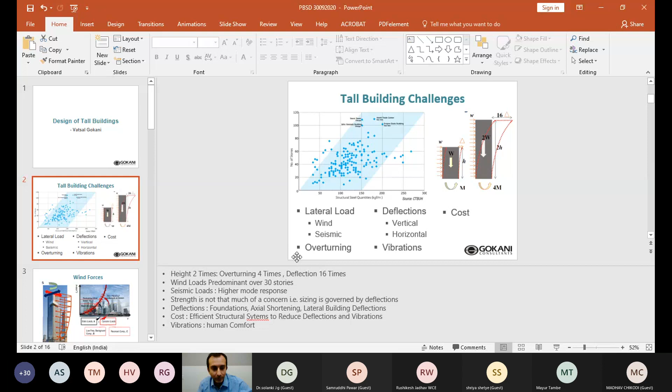Hello, sir, your voice is not coming. Hello sir. Samruddhi, both audio and video— Hello. Sir, your presentation is visible, but please unmute yourself. Hello? Hello, sir, can you hear me? Yes, voice clear, sir. Hello? Sir, nothing is audible. Hello, sir, hello? Am I not audible? Yes, sir, your voice is audible now.

So an introduction was given regarding tall buildings and why they are required. The main difference between a tall building and a short building is that both these buildings have gravity loads on them, and both are susceptible to lateral loads. But the main challenge in a tall building is that these effects increase exponentially, so certain important and significant behaviors in the building become very sensitive, and that starts governing the design.

Let me give you an example. A building is nothing but a cantilever coming out of the ground. There are two images, one with a smaller building and one with a taller building. The smaller building has a height of h, and the taller building has a height of 2h. If the load applied on these building cantilevers is the same, the bending moment at the bottom increases by 4 times due to the lateral loads. The vertical load increases only 2 times, but the bending moment due to lateral loads increases by 4 times, just by a height difference factor of 2, when the building goes from height h to 2h.

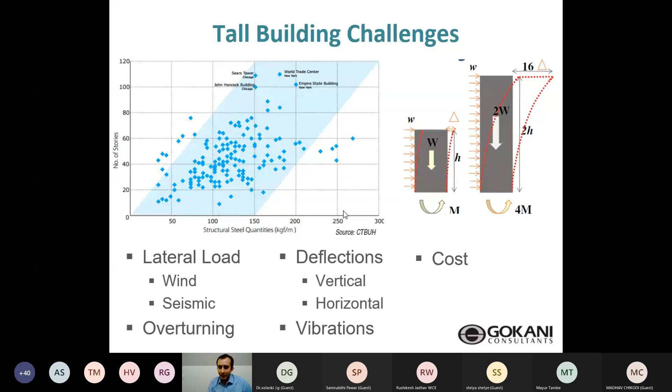So these are the main challenges in a tall building, and everything else falls into place if you address these challenges one by one.

Now I'll come to wind forces, one of the most predominant forces in a tall building. Wind forces acting on a building are not just static loads, they're dynamic loads. Because wind comes in gusts, there's a fixed component and a fluctuating component to the wind. You might have felt this sitting on a mountain in the open—wind doesn't just continuously hit you, there's a fluctuating component as well.

This fluctuating component, combined with the slenderness of the tall building—since deformations increase exponentially as building height increases—interacts with the dynamic, fluctuating components of the wind, and this is what controls the wind design.

These wind loads acting in one direction - we sometimes feel that because of the slenderness of the building, it will vibrate in the same direction. But that is not true. Even with wind predominantly in one direction, there can be crosswinds and torsional components which make the building vibrate in the direction perpendicular to the main building. This is what needs to be analyzed, and this is why wind loads become very important as the building becomes slender, especially in tall buildings.

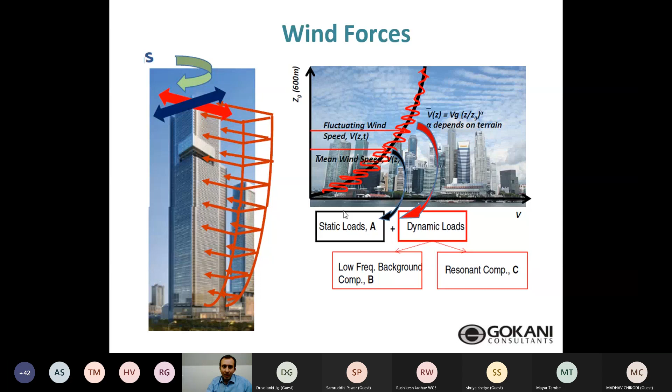The next slide is just a 1-minute video of how the oscillations take place in a building. It will give you a feel for what you need to control as a structural engineer. I don't know if this is a poorly designed building or not, but this is something that happened at the 50th story. I'll just play the video.

This is a chandelier - it's shaking. If you were sitting there, you would not be really comfortable with the chandelier shaking with respect to the floor. It's a very scary situation.

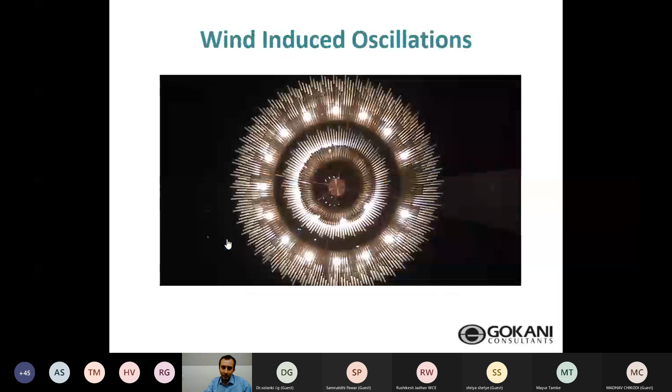This is kind of a long video, just 1 minute, but you'll understand what happens.

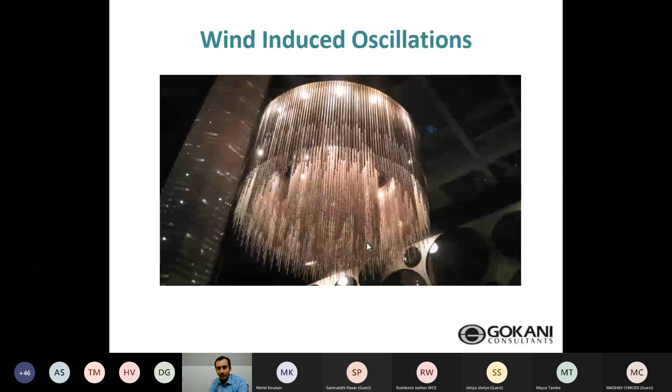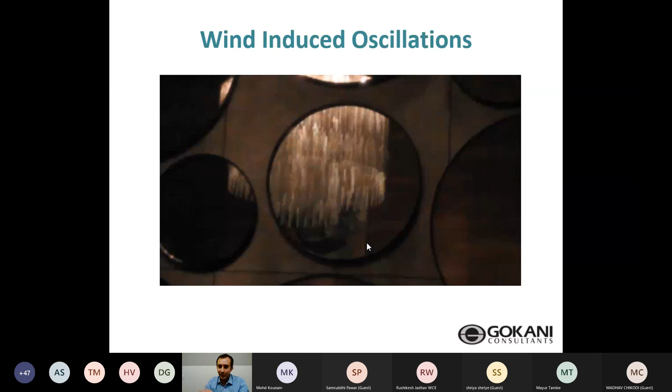You can see the oscillations in the wind with respect to the oscillations in the chandelier relative to the mirror. This is what happens, and it's very uncomfortable for a user - the building will not fail, but it's very uncomfortable for someone dining in a sophisticated restaurant. So this needs to be controlled by the structural engineer.

These wind forces are calculated using codal provisions, but the codal provisions give only a very approximate estimation of the forces, and these are valid only for certain assumptions - that the building is properly rectangular or properly square. They will not give you detailed calculations for the accelerations and vibrations happening at the top of the building.

So then what is the way out? What we generally do is make a scale-down model of what is actually happening around, and we estimate the building based on historical data of wind collected from various locations. In a wind tunnel, you test this at a much smaller scale.

We combine it with the flexibility that is there in the tower, and then estimate what kind of forces are going to come on the wind structure and on the tower, what kind of vibrations are going to come on the tower, whether they'll be within control or not. Such wind tunnel studies are very important for high-rise buildings, especially when the building goes above 150 meters or is very, very slender.

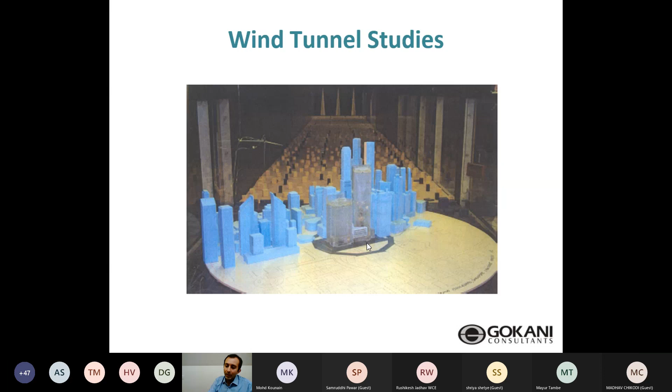The other forces that act on a building are seismic forces. The real seismic forces that you design for are generally about 1/10 to 1/8 of what seismic forces the building would really endure during an earthquake.

So what is the reason? These seismic forces are very, very high, and you cannot really design for these forces - you make the building go into the non-linear mode, that is, make the building crack so that it just stands. This is the philosophy of seismic design. That's why a lot of times, around 30-story buildings, the wind forces tend to be higher than the seismic forces. But you need to design to make sure that although there is cracking, there is no collapse - this can be done using ductile detailing.

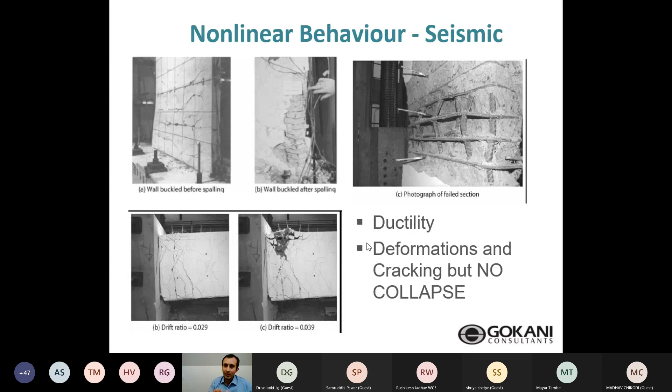This is again very, very important for a tall building. Secondly, what is important for a tall building is that it will not just vibrate like a pendulum coming out of the ground - it will have various multimodal effects that need to be checked when you analyze a tall building.

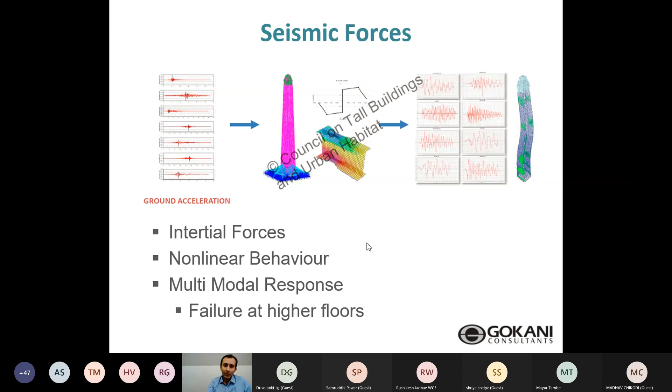For very, very tall buildings, you need to do something like an analysis where I'll show you what kind of analysis we've done in our office, and you see the kind of vibrations that happen. This kind of design is not done in a regular design office, but see the behavior - this is the behavior that happens in the real earthquake, which cannot otherwise be captured.

So this is what wind tunnel is to code-based forces - this kind of performance, this time history-based performance, is the difference between the codal analysis and this behavior. This is known as something like a performance-based design, and this is again state-of-the-art in the design of tall buildings.

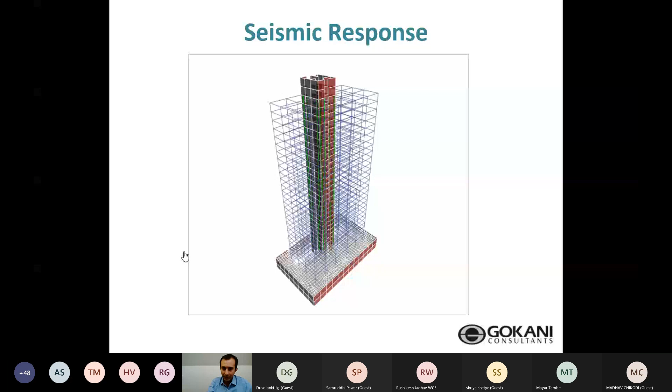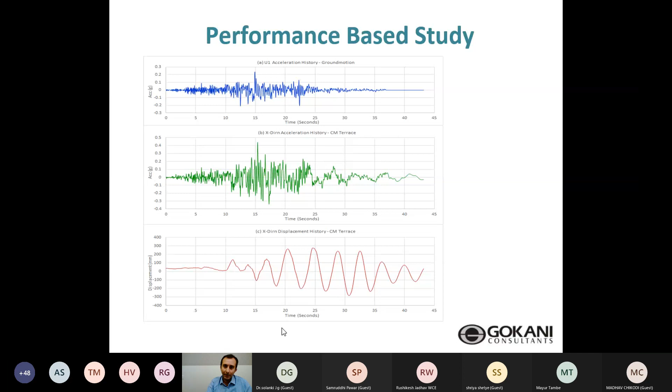So you study the real performance of a building and find out the accelerations and the forces on the building. The other important aspect in tall buildings is vertical deflections.

Why vertical deflections? Because a lot of times we need to segregate the lateral load resisting system from the vertical load resisting system, as the load resisting system that takes care of lateral forces is much thicker and stronger than the columns placed on the periphery or at various locations. These columns are pretty small compared to the cores and shear walls.

So what tends to happen in these tall buildings is the vertical deformations of these strong, heavy shear walls is much less than the axial deformations of these very slender or small columns. This can cause differential shortening, leading to serviceability problems, cracking of partitions, cracking of glass, and you would not like to stand in an area that is sloping because it has deflected. This will not actually create a structural failure, but it is a serviceability failure.

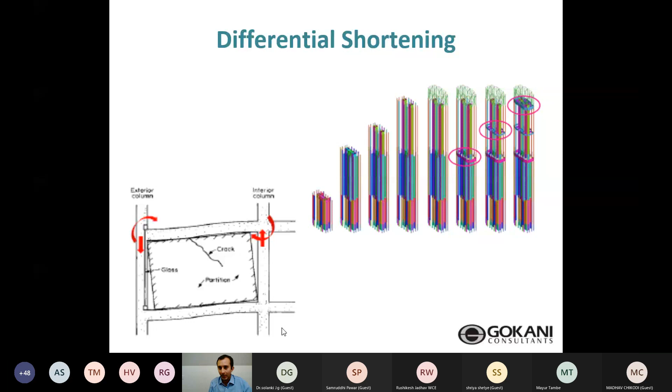These failures need to be addressed, and in really tall buildings they're addressed using staged analysis, which is a state-of-the-art, step-by-step analysis to understand what kind of deformations happen as the building goes up and over time because of differential creep and shortening. So this is another important aspect in a tall building.

Another important aspect in a tall building is foundation design and settlement. Tall buildings tend to have foundations that are very close together, and these closely spaced foundations interact with the soil or rock below. What happens is the deflections you calculate for individual components are much smaller than the deformations you calculate for the entire foundation system.

Because of this, the differential settlement—the settlement from one end of the foundation to the center—becomes of utmost importance for serviceability purposes. If you do not design this well, the building might not fail, but it might sag at the center and not deflect at the ends, creating a serviceability problem where it's not feasible to use the building, or sometimes the building will tilt on one end. So these things need to be taken care of by sophisticated analysis.

So these are the four main things that need to be taken care of. The second other thing is, since lateral loads are very important, a lot of times in these slender buildings overturning takes place. So differential settlements and overturning in tall buildings are absolutely important and need to be taken care of.

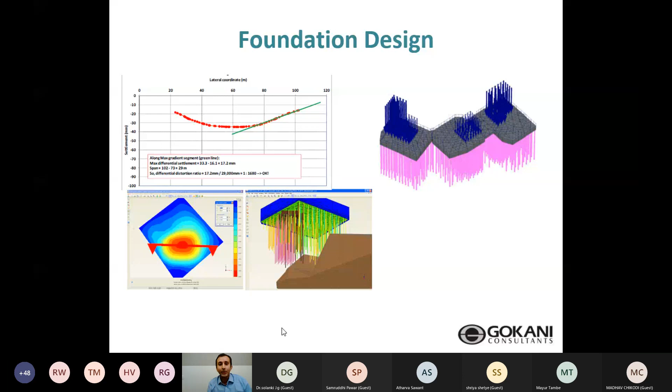I'm not saying all this does not need to be taken care of in a small, shorter building, but all these aspects we discussed—vibrations, seismic loads, multimodal effects, differential settlements and overturning, and different axial shortenings of the shear walls and columns—are actually very sensitive in a tall building and need to be checked explicitly.

So this is over and above what you do in a smaller building. Now, since a tall building is slender, you do not have a lot of floor space area to put in material required to resist all these forces. So innovative and very efficient structural systems are important, which maximize the cross-sectional moment of inertia of the building, and for a given amount of material produce the least lateral deflections. Depending on the height of the building, you'll have to use more innovative and efficient structural systems.

For example, a structural system could be a shear wall system, a beam and column system, or a combination of a shear wall and beam and column system. Sometimes, if it's a steel structure, you use braced frames. So how you use that in a tall building becomes very important.

For example, a braced frame in a steel structure works fine for approximately a 10 to 15 story building. But once you go above that, these braced frames start to become inefficient—you'll be able to design the building, but the braced frames become so heavy that the building becomes very expensive. So then you move to a more rigid system, like a system with concrete frames.

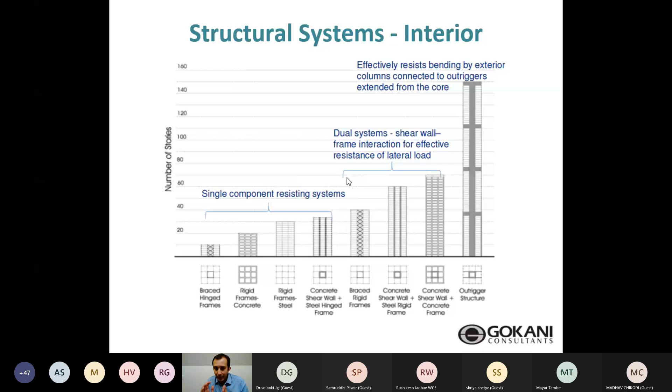Depending on the height of the building, it would be very important to select the optimum structural system. This is very important as far as usability and cost is concerned.

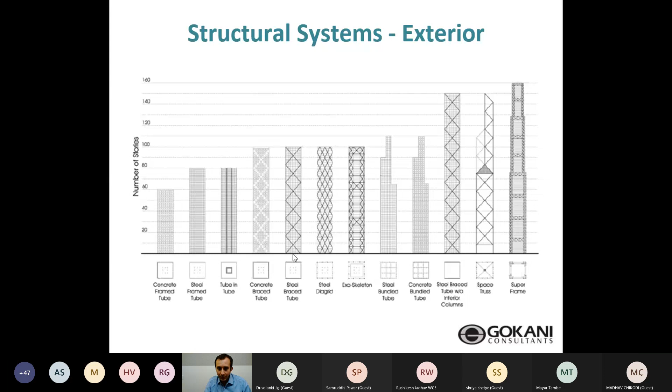The other structural systems, for exterior structural systems, are bracing type of systems, tube-in-tube type of systems, and super frame kind of system.

To give you an example of dual systems, take for example this building, which is approximately 180 to 250 meters tall, where a dual system would work very well. A dual system uses shear wall as well as frames.

So you can see there is a lot of shear walls at the center. There is a flat slab around, and there are these columns and perimeter frames which engage these columns, increasing the moment of inertia of the entire system.

If it was only a cantilever system, it would sway more, and then you combine that with these perimeter moment resisting frames, which tend to come into effect on the top floors, giving you a very efficient dual system.

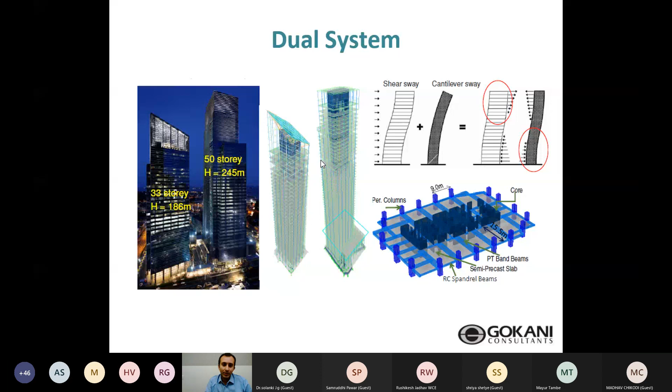Now, if you have higher structural systems, taller buildings, you need to use more innovative structural systems like the outrigger systems.

So you have a shear wall core at the center, and you have these exterior columns, and you need to engage the entire width of the building, because this width is pretty narrow for a tall building which is 250-300 meters.

And to engage this entire width of the system, you need to introduce strong elements connecting the core to the outside. For example, imagine you are standing and somebody pushes you, so you will fall down.

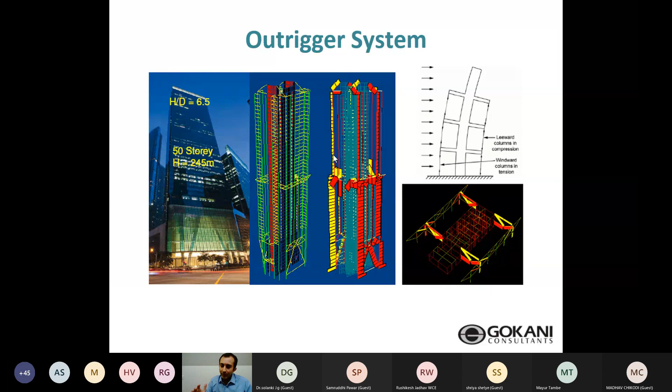But imagine you are standing and there is a table next to you, and you take support from that table. So for somebody pushing you, he will have to put in much more effort to topple you. This is the kind of outrigger structural system.

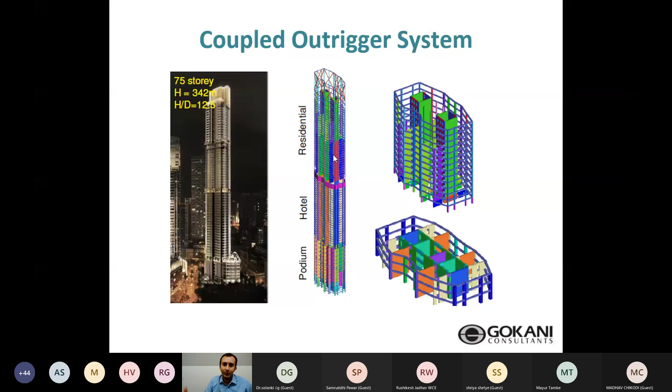Then there is something called a coupled outrigger system, where you have coupled shear walls with certain cutouts at certain floors, and these cutouts make the system an outrigger system. In effect, they are coupled shear walls which engage the entire width of the building, and these systems can be very effectively used for very slender buildings.

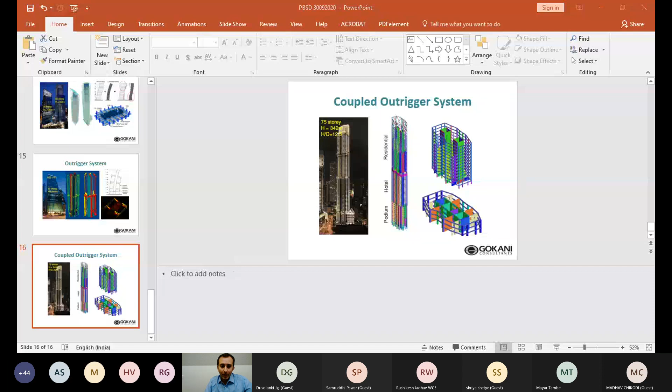So with this, I would like to end my presentation. What I'll do is go to a live example that we designed in my office. This is around a 175-meter tall building, and I'll show it.

I will start with presenting the design basis report of a high-rise building, approximately 170 meters tall, which was designed in Mumbai, and the slenderness ratio is 1:9.

I hope everybody can see this high-rise report. Can you see this, whatever I have presented? Yes sir, it is visible.

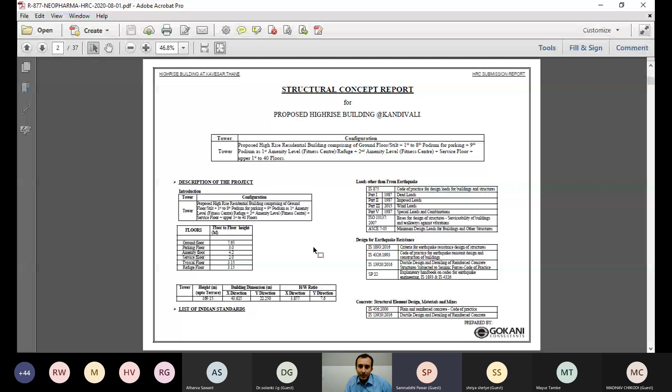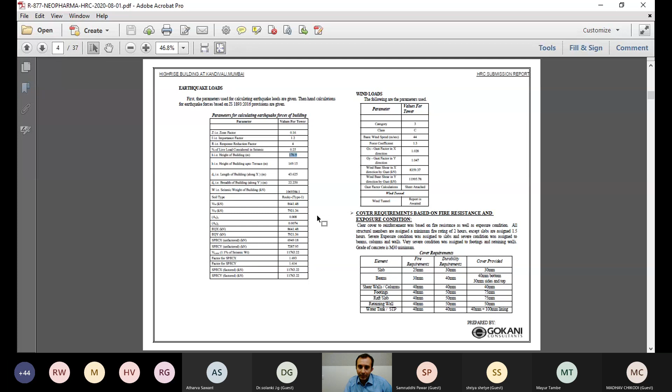So the height of the building is 176.9 meters, and the base width was pretty slender, as in the lateral load resisting base width. I'll show you first the plans of the building.

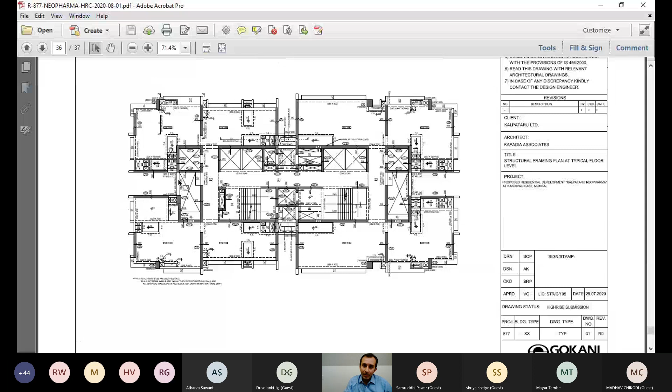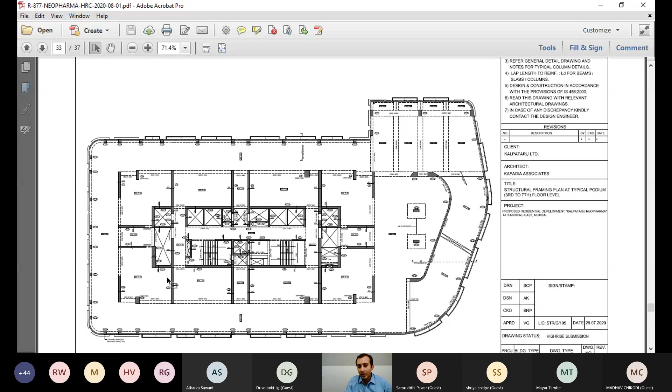On the lower floors, these gravity columns are just for the ramp. These are gravity columns, they do not take part in the lateral load resisting elements. These vertical frames, these vertical shear walls are what are actually taking the lateral load. So these gravity columns are in fact floating from the ground floor as cantilevers, because we needed open space for the 9 meter cantilever. But since they are part of the gravity system, not the lateral load system, we could do that.

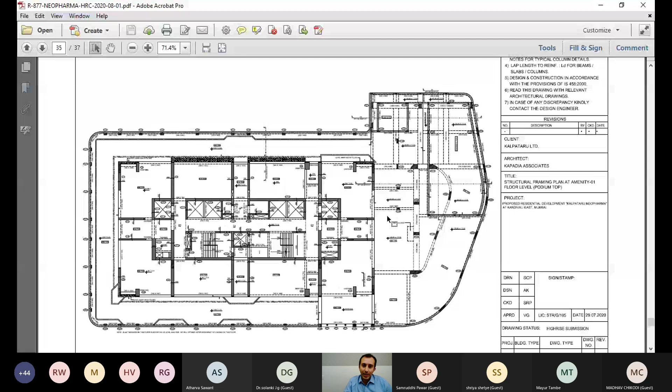So this is a pretty complex building. At these amenity floors, we close up the openings, creating 2 stories deep or 1 story deep outrigger beams, so that the moment of inertia of the building increases. So effectively, even though the building is pretty wide at the bottom at the parking floors, the lateral load is only taken by this small distance, which is the main building width. And that was what was governing the deflections and the accelerations at the top of the building in wind.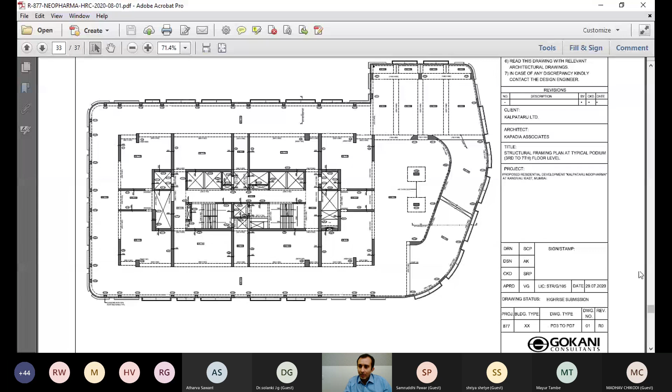So what we did was we created this report for the high-rise committee, and I'll just run through the report. This is the proposed high-rise building with 9 podiums, amenity floors, 2-level amenity floors. There is an amenity floor at the top also. There is a service floor, and then there are 40 habitable floors.

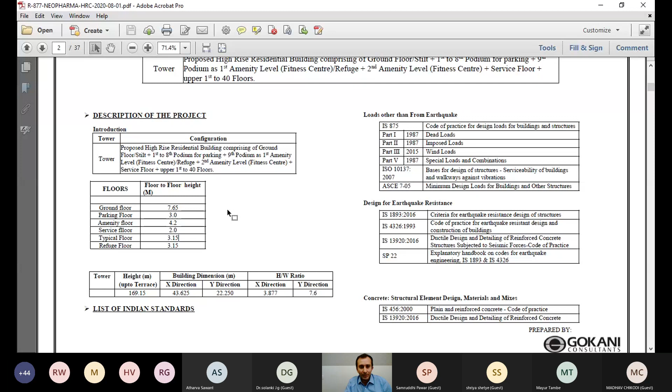The typical floor height is 3.15 meters. The ground floor height is around 7.65 meters. The amenity floor heights are 4.2 meters. So up till the terrace level, the height is 169 meters, and up till the top, including the elevations, the height is around 180 meters.

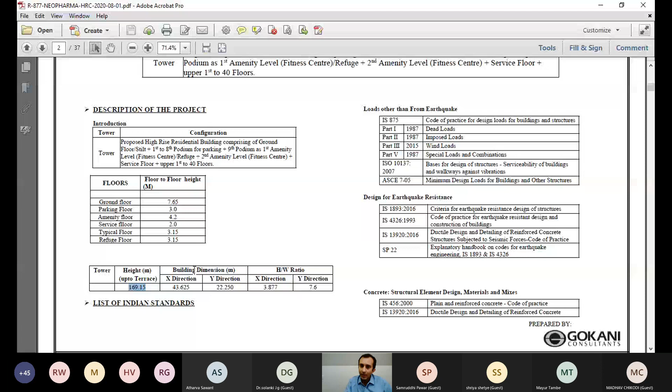So these are the various codal provisions that we have used in the design of the building. In addition to this, we've also used the tall building code, which is the 16700.

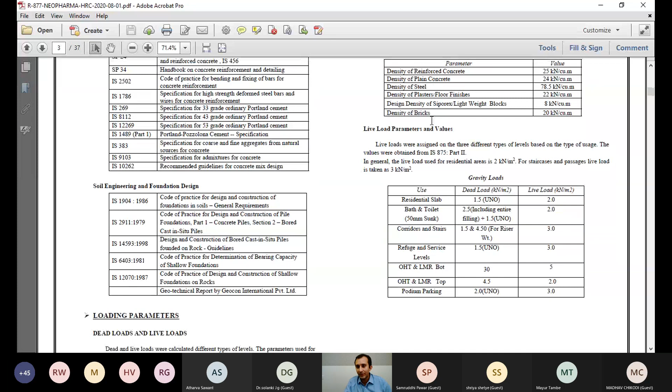Now you see the various dead loading parameters that we have taken. This is standard, which is there in IS 875. These are the IS 875 live load parameters that we have used for residential slabs, for corridors, for refuge areas.

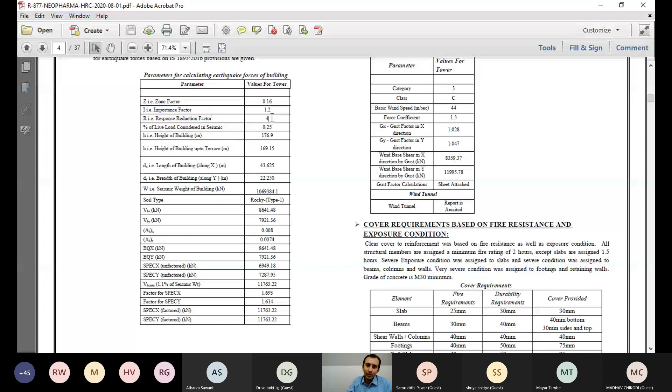And then these are the earthquake loads. The zone factor, since it is in Mumbai, is 0.16. The importance factor is 1.2. The response reduction factor, where you reduce the earthquake loads to ensure and provide ductility, we have taken as 4 as per the code. Based on this, we've calculated the seismic forces based on IS 1893. We've used minimum 1.1% seismic weight as per IS 16700. The seismic weight, the lateral load, comes out to be 11,700 kilonewton, that is approximately 1200 tons of lateral load applied to the building in a seismic event.

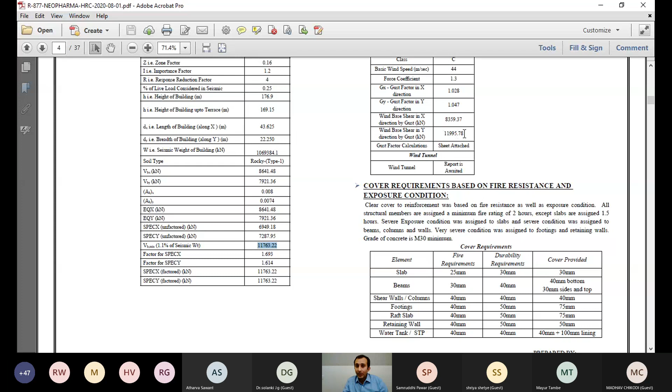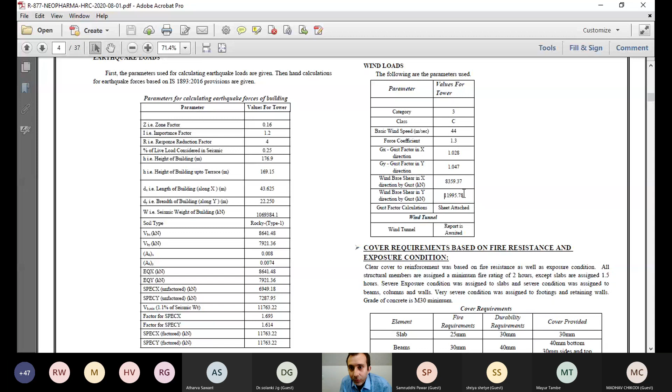Similar to that, we found out the preliminary wind loads based on the gust factor method. The gust factor method is used for slender buildings, which is again given in the IS 875. For this tower, the lateral load is around 1200 tons as well with the gust factor.

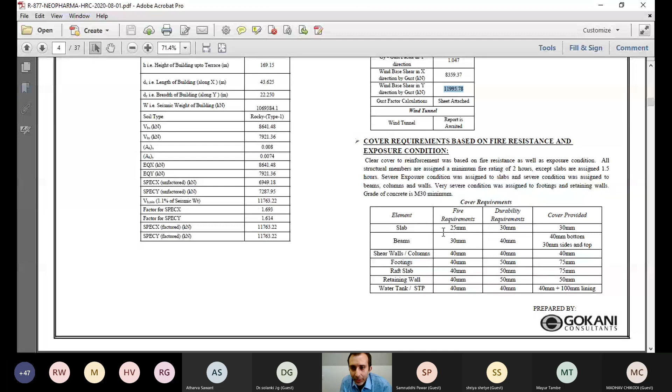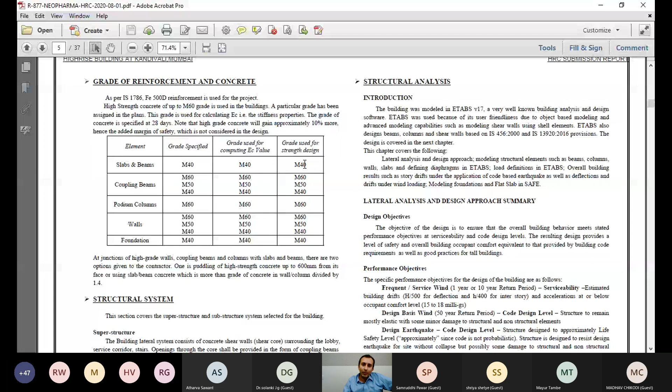So the cover requirements of the building with respect to fire and durability requirements, the grade in that building -- we went up to M60 grade concrete, right from M60 to M40 grade concrete. Because the building was slender, we did not go below M40 grade concrete.

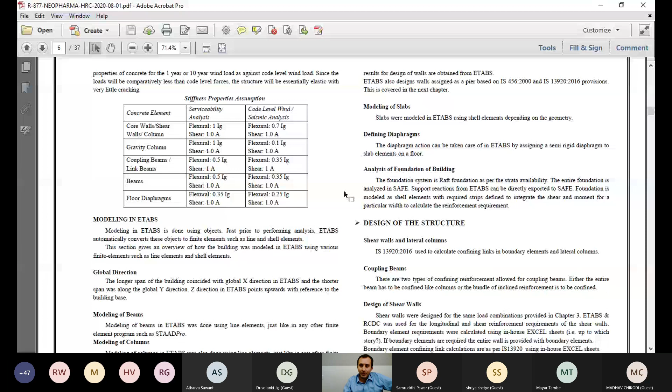The foundation system that we used was a pile raft kind of system. Again, I'll show you the foundation system. This is the entire building area, and we used 1000 mm dia piles with a thick 2.75 meters raft, that is approximately a 9-foot high raft, that is 1 story, which was connected throughout.

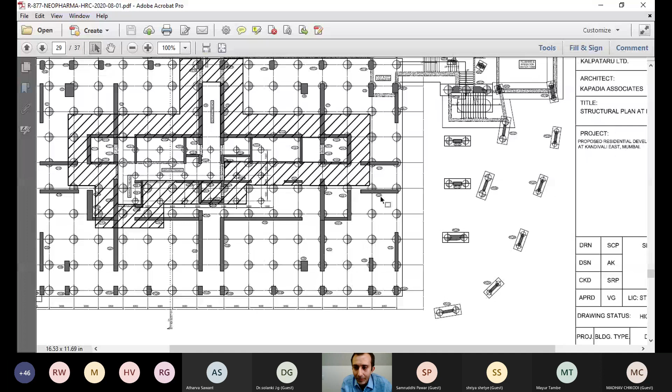So just imagine the thickness of the raft, and these are all piles. Each pile would take in the range of 500 to 600 tons of load. And certain perimeter columns, you can see, we've just taken 2 piles or something. These piles rest on rock, so differential settlement is not that much of a concern. But if it is in an area like Kolkata or Delhi, differential settlements would definitely be very, very important.

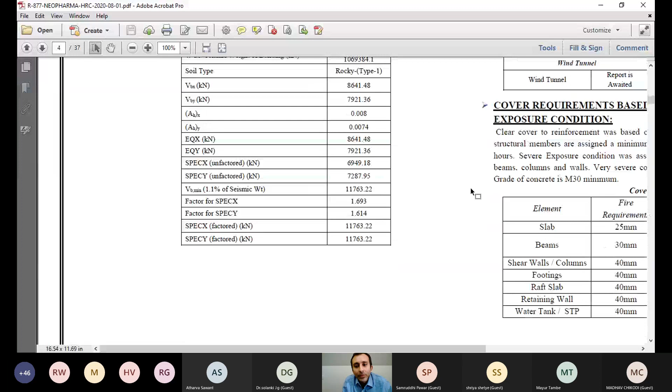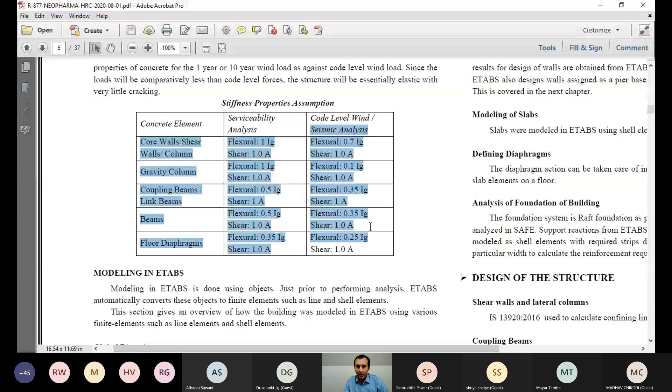So these are the stiffness modifiers that we have used for various types of analysis. For the serviceability analysis, which measures deflections, we have less cracked property modifiers. Here we have more cracked property modifiers for the seismic and the code level design winds.

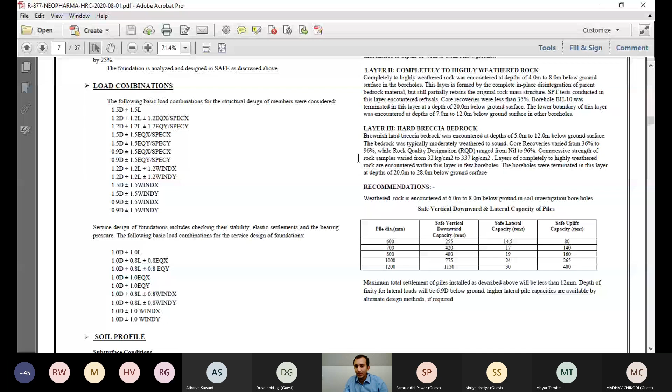Then the load combinations that we've used in the structure. The 1000 mm piles have a downward capacity of 775 tons.

And these piles, once installed, a lot of them will be tested to ensure that this 775 ton capacity is met. In fact, we are also conducting a static load test on the pile to ensure this capacity is reached, because it's a very high capacity, and we are installing one pile as we speak to get it tested using a static test method, so that all the other piles can be installed later.

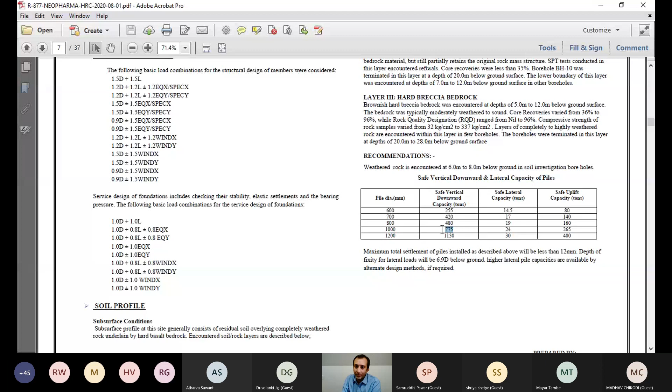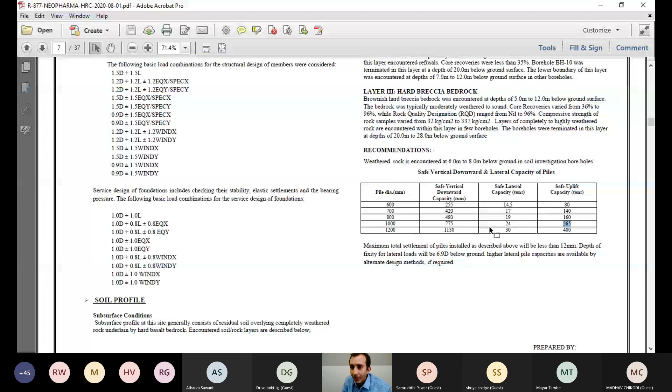Because there is a lot of overturning in these slender buildings, these uplift capacities become important, because the building moves in one direction and the piles in that direction come into tension, even though there is a lot of vertical load. Otherwise the piles will just slip out of the ground. So this is also something that needs to be checked.

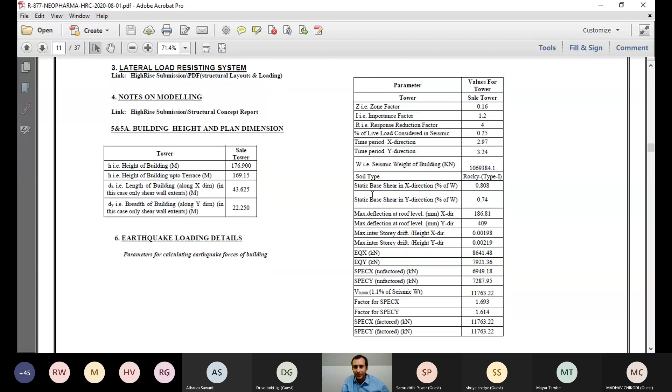There is a structural checklist which we've given to the HighRise. The slenderness and everything is described. These are the various loads acting on the building - I'll just run through it. As you can see, in the Y direction, in wind, the maximum deflection is 409 millimeters.

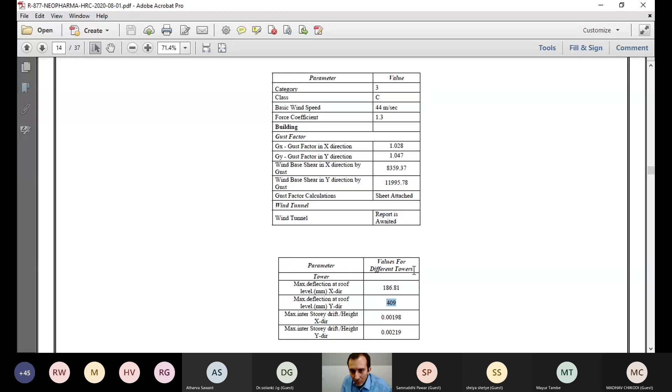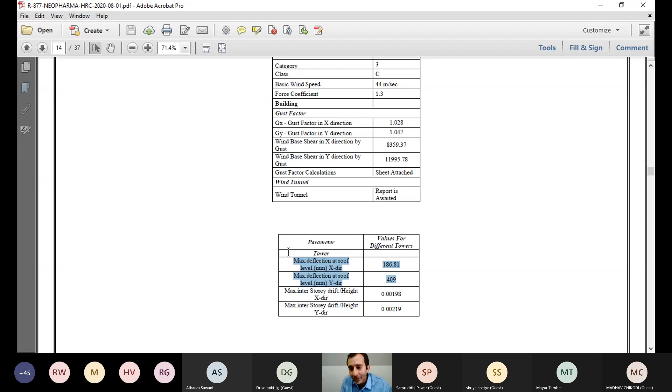Since it was not under control, we had to go and do a wind tunnel test to see whether these deflections and accelerations at the top - which we calculated using the gust factor method - would not actually create a problem with the building.

So this is the gust factor that we've used, as per IS 875. These are detailed and exhaustive calculations, and these are the loads that are applied on the buildings.

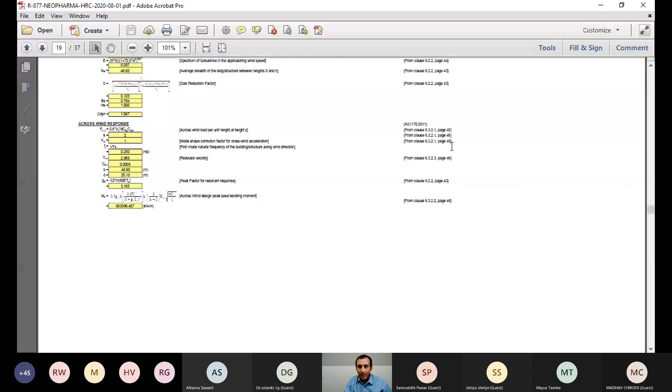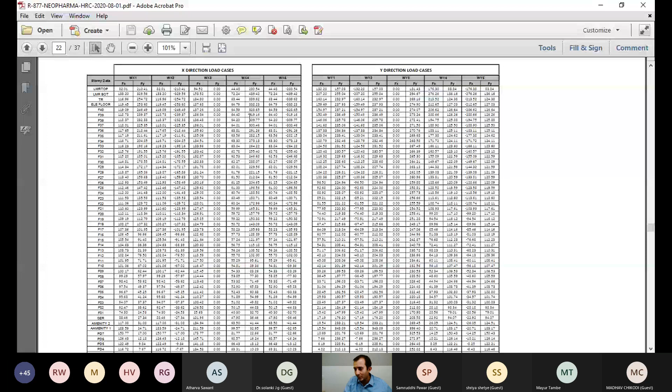There are various cases of how we apply load on the building - 5 different cases in each direction. So this is a lot of work. We generate about 70-80 load combinations for each element, and we design the building for that.

The other most important thing is the mode shapes of the building - the natural frequencies and vibrations. What's important is the principal mode shapes: X direction, Y direction, and torsion. In the design, torsion should not be the first or second mode, otherwise the building will start vibrating and create unnecessary rotations which might amplify the design in ways you cannot capture. So it's important that torsion is the third mode.

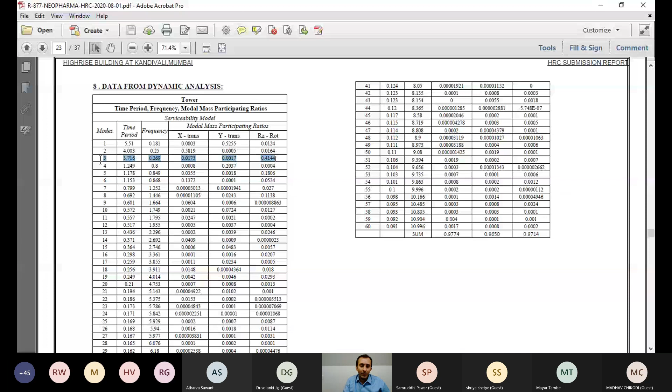In the X direction, the translation second mode shape is 4 seconds. Here the X direction is important, and torsion is 3.7 seconds, with the third mode governing in torsion. So this is the behavior of the building.

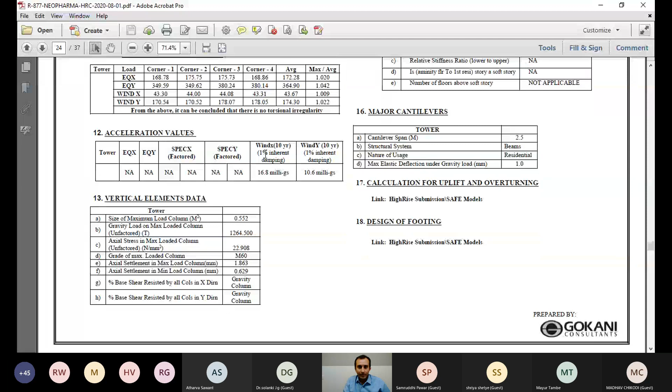These are the various deflections of the building, and these are the various calculations.

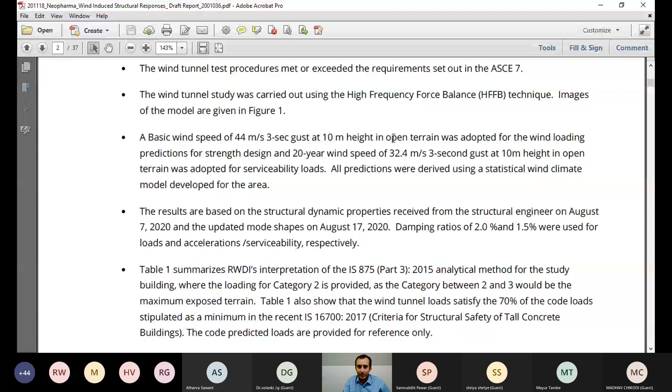Now what I'll do is move to the wind tunnel testing report. It's an interim report because we were getting some problems with the codal provision, so we tested it using the wind tunnel. As you can see, this is the wind tunnel report given by RWDI.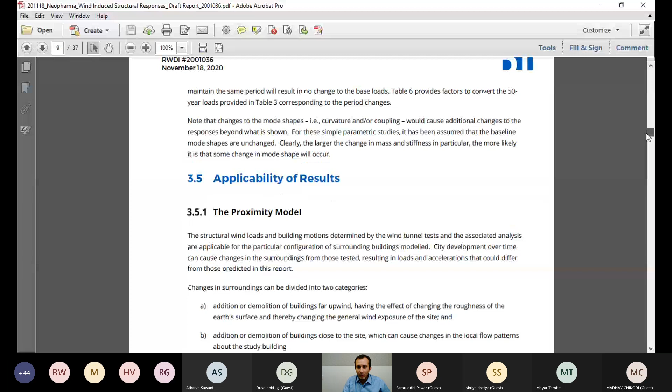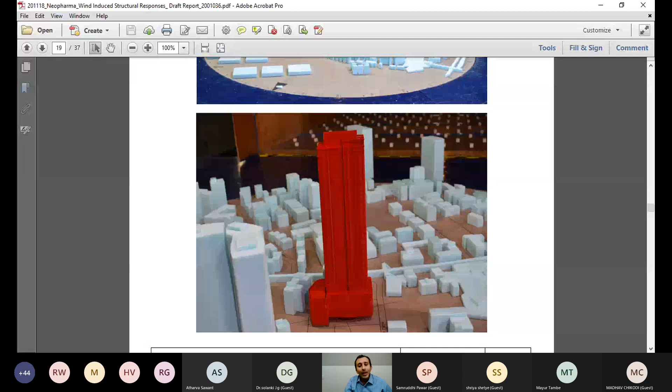So directly I'll move to the model we created. You can see this is the building, and this is the model that RWDI created for the wind tunnel. This is a rotating table - the table rotates, and winds from various directions are blown on the building to find the forces on the tower and the acceleration.

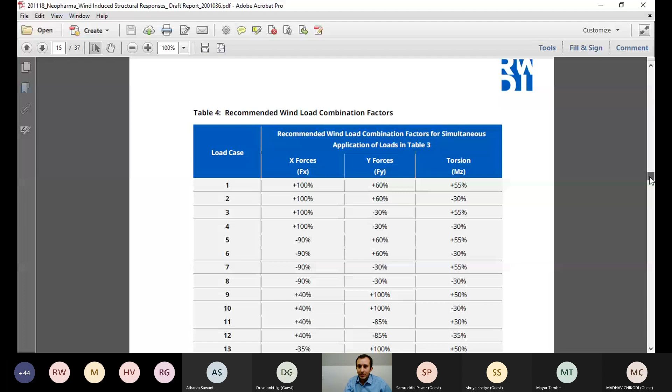So what this report does is find the deflections in the building. Based on this, it finds the interaction of forces in various directions, since wind can come from any direction. There are 24 load cases that they have given.

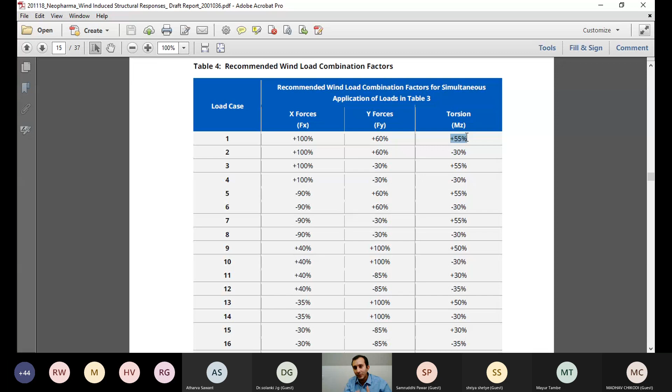So this first load case says governing 100% in one direction, 60% in the other direction, and the torsion in the wind is 55%. They have given 24 load cases to be analyzed just for the wind condition, and they have also done the vibration analysis.

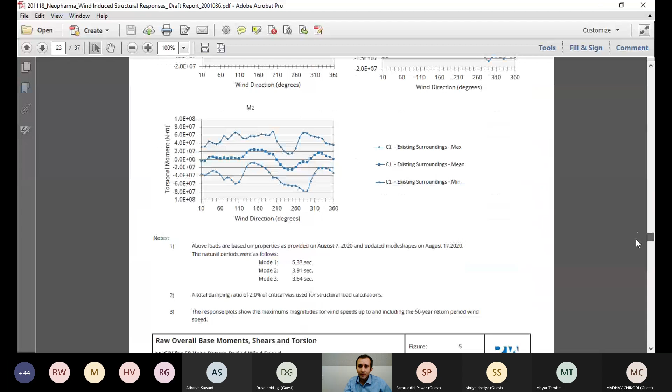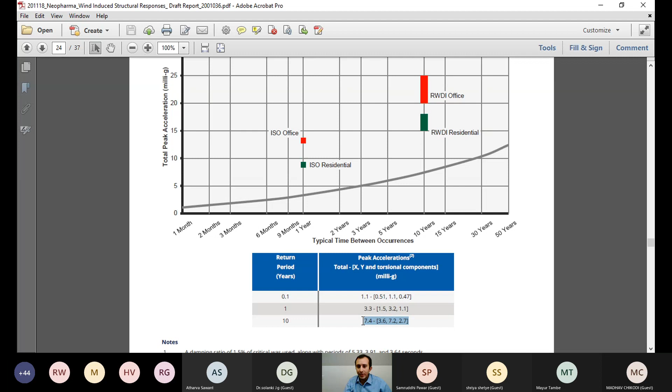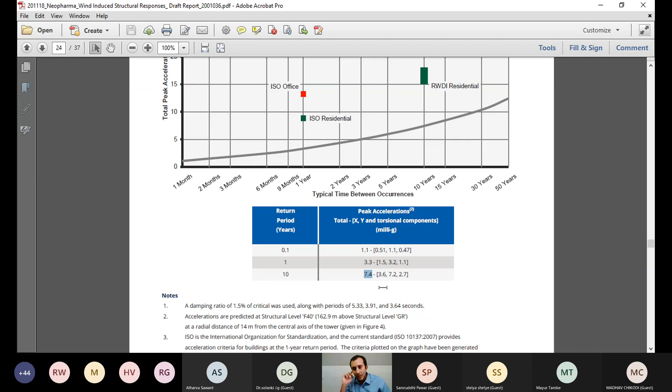They have also done the vibration analysis for winds at various return periods. For a 10-year return period, the vibration should not be more than approximately 15 milli-g's, which is 15 times 10 raised to minus 3 into acceleration due to gravity. So the acceleration should be less than that, and here our acceleration is only 7.4 milli-g's, so we are significantly in range. This is an interim report, and the final report is yet to come.

So we measured everything, and this is how a building is actually designed in a design office. I'll close the presentation now, and I think we are done with the presentation. So this is around.

Hello. Hello, sir. Yeah, yeah, so we are done with the building presentation.

So we discussed the various aspects that are important in the design of a tall building, and then we went ahead and saw the actual design of a tall building in the design office, so you could get a grasp of what happens in a design office.